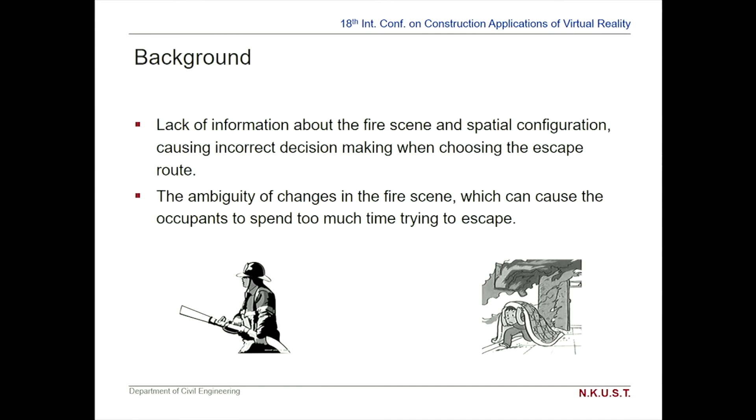To summarize the above, the most dangerous conditions in a fire scene for both groups of people are: first, lack of information about fire scenes and spatial configuration, causing incorrect decision making when choosing the escape route. Second, the ambiguity of changes in the fire scene, which can cause the occupants to spend too much time trying to escape.

Based on the above reasons, this research integrates three major research fields: BIM, fire simulation, and IoT technology to develop a structure fire visualization and warning system. This system can provide useful information to firefighters so that they can be aware of the fire scene's environment and create an effective rescue plan. The automatic LED escape route pointer could assist building occupants to escape and allow them to discover hazards in time, so that the number of casualties could be minimized.

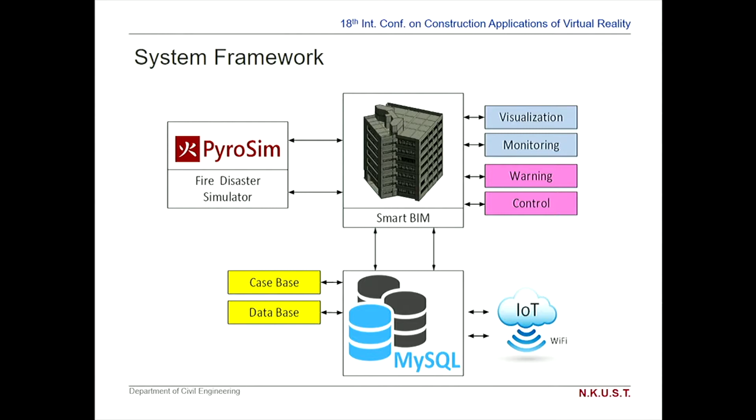This slide shows the system framework. Prior to the fire, it is possible to simulate different fire scenarios using FDS and visualize the results in a BIM model. This allows users to understand the possible hazards and situations that may occur in the environment during a fire. In the event of a structure fire, we can use IoT technology to retrieve real-time conditions and present them in a BIM model, providing a visual representation of the environment and a warning function for evaluation in rescue planning. In addition, the system can control the LED guide pointer according to the real-time situation to assist occupants to escape, reducing the number of casualties.

This research uses the BIM model as its foundation and also as the input source of the fire disaster simulation, so reobtaining and reconstructing the data does not consume a huge amount of time and labor. Then we set up the position of the fire source and the simulation parameters according to different scenarios. The simulation results are returned to a case database from which firefighters can retrieve a case similar to the current situation. The case results obtained from the simulation are translated into the BIM model and can be visualized in various ways, such as 1D text, 2D diagrams, and a 3D model as a rescue basis for the firefighters.

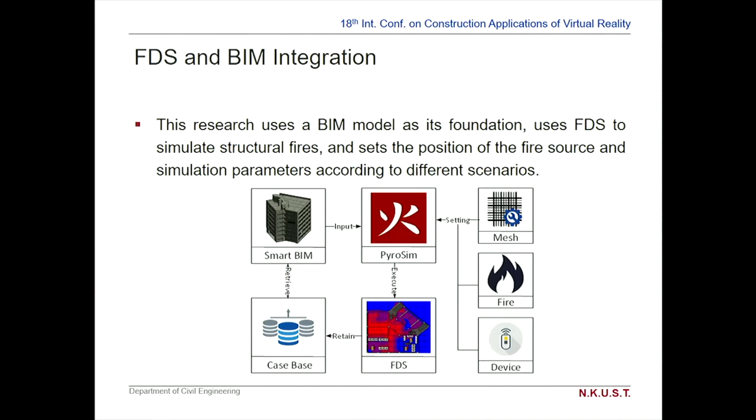This research also integrates an IoT framework to propose a smarter escape alert function. Environmental sensors gather the building's physical factors, and these physical factors are used to control the LED guide pointer to present danger alerts and evacuation guidance.

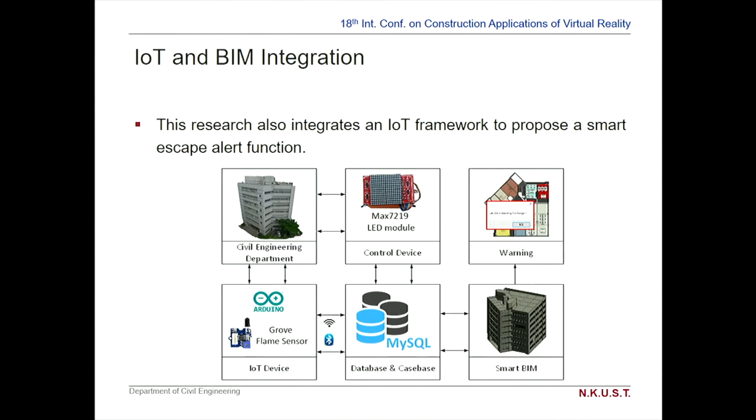For example, the setting of this research was the Department of Civil Engineering at National Kaohsiung University of Science and Technology. This is our building. A BIM model of a 7-story building with a basement was constructed with Autodesk Revit for testing purposes, as shown in figure A. This research uses PyroSim software to perform the fire disaster simulation, as shown in figure B. The cases chosen are the research laboratory on the 2nd floor, the computer room on the 3rd floor, and the material laboratory on the 5th floor.

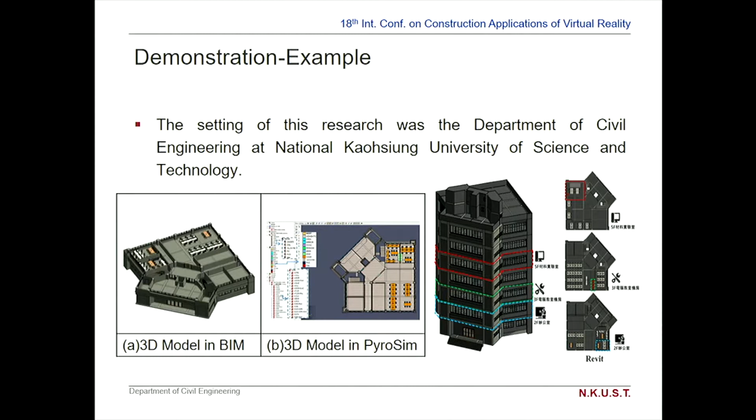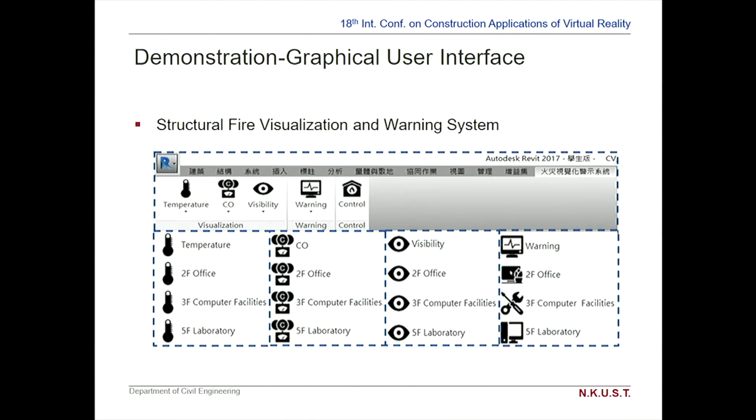This slide shows the graphical user interface of the structure fire visualization and warning system. This system was constructed in Autodesk Revit, and Microsoft .NET C# was used to develop the API. In the process of using PyroSim to simulate the fire, this research placed a device 2 meters in height in each enclosed floor mesh. This device collects output values from the structure fire simulation and creates a data report for future use in data visualization. The figure presents the mapping of the device locations to UV coordinates in the BIM model. These points provide the simulation result values for data visualization.

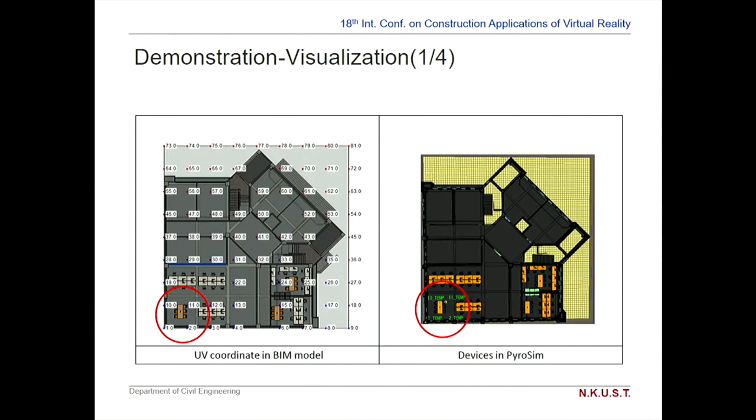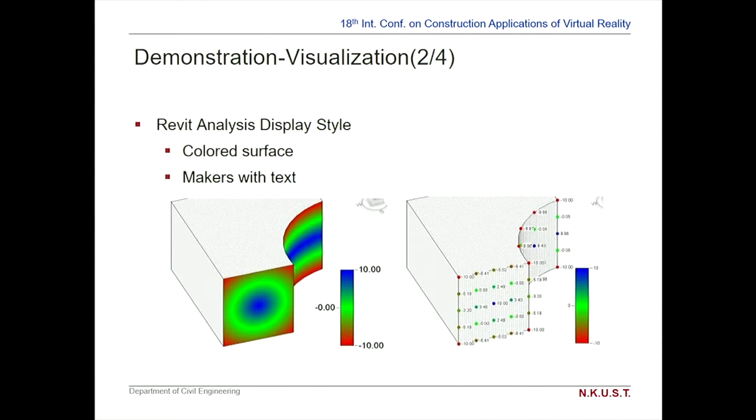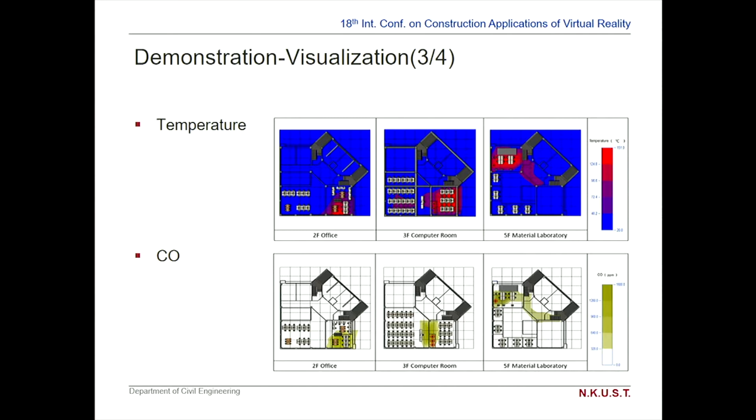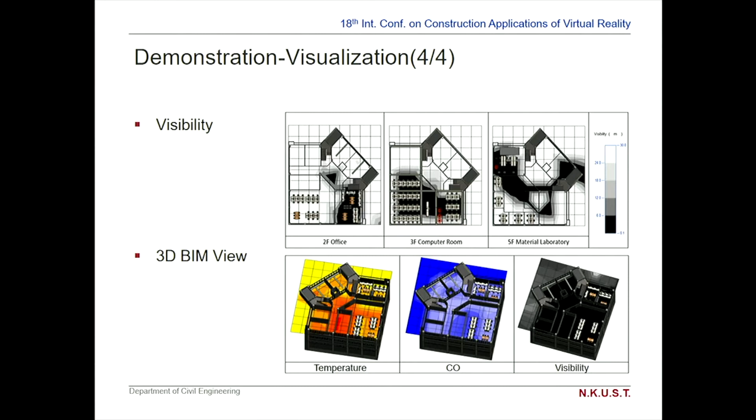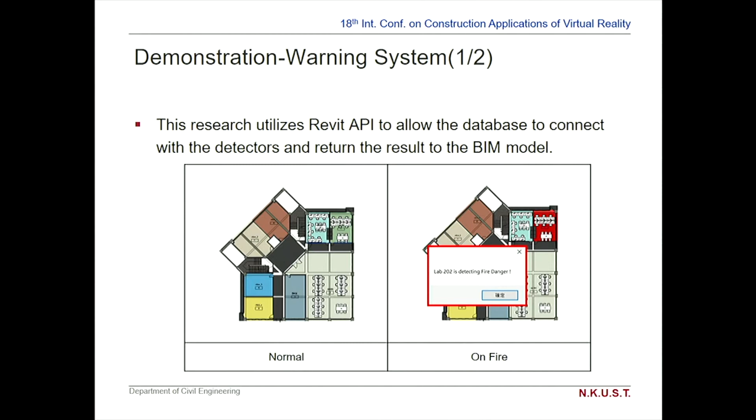This research utilizes the Revit API to allow the database to connect with the detector and return the result to the BIM model. When the detector detects a rise in temperature or a flame, the system will send out alarms and point out the position of the abnormality, as shown in the figure. Firefighters can also evaluate the trend of the fire and control the LED guide pointer based on the simulation results and environmental monitoring data. For example, when a flame is detected, the door element in the BIM model will shine and display a warning, and the system will automatically switch the LED pointer to no entry in order to prevent evacuees from opening the door of that emergency exit, which may create more casualties.

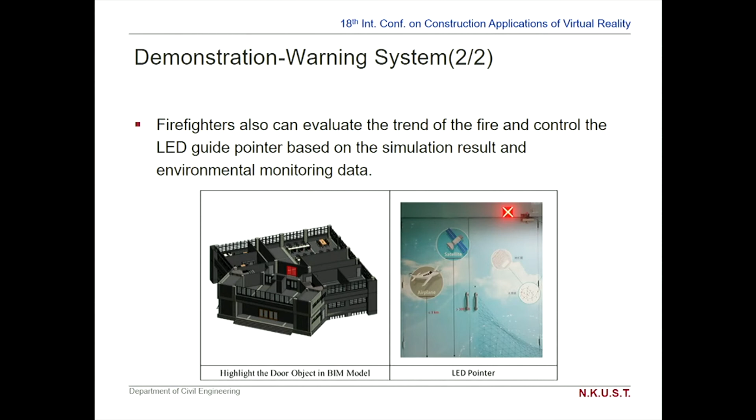Conclusions. This research mainly solves the data integration problem of FDS, BIM, and IoT, and it provides accurate real-time data to firefighters. This eliminates the lack of information inherent to traditional fire rescue, which can lead to casualties. Furthermore, automatic guide pointers that provide correct instructions according to the simulation results and the live situation may reduce the number of casualties due to panic.